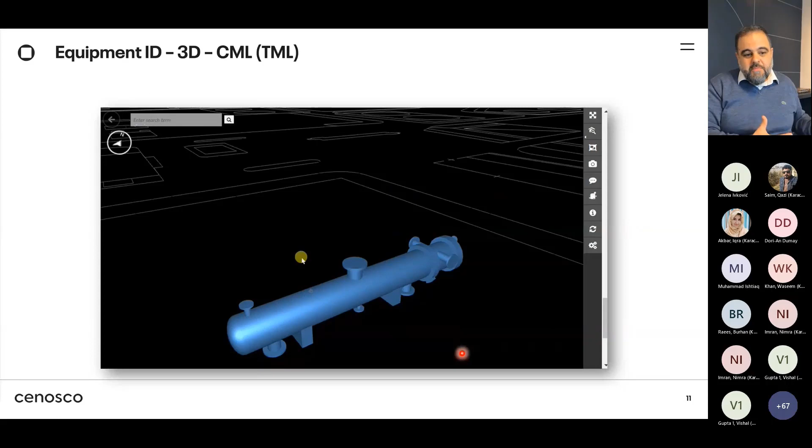Looking at the technology, how do we work with the tool? We do have 3D models, we do have isometrics. So you can open a 3D model on your right and open the isometric on the left and see where the CML is correlated. You can color code them, for example, color code in red the CMLs with the high corrosion rate. So the system is bringing all this technology on board.

When you're doing an RBI calculation, you can open the RBI, see the specifications, see inspection history, criticality, corrosion calculations from your wall thickness measurement, calculators from API, look at process conditions, and get a next inspection date where you have a schedule. That schedule has a plan, has activities or tasks. So you relate the equipment to a risk program, to a schedule, and that schedule will have tasks that are related to that degradation mechanism. So your inspection plan is heavily based on data.

IMS also brings a lot of features into barrier management. In IMS, we identify the degradation mechanism, we implement a barrier to prevent or control that degradation, and then we implement indicators. How do we know that barriers are effective? We know if the barrier is effective by using an IOW. If you have an exceedance, your barrier is compromised. If you do an inspection and find corrosion, your barrier is compromised - you don't have any more corrosion allowance.

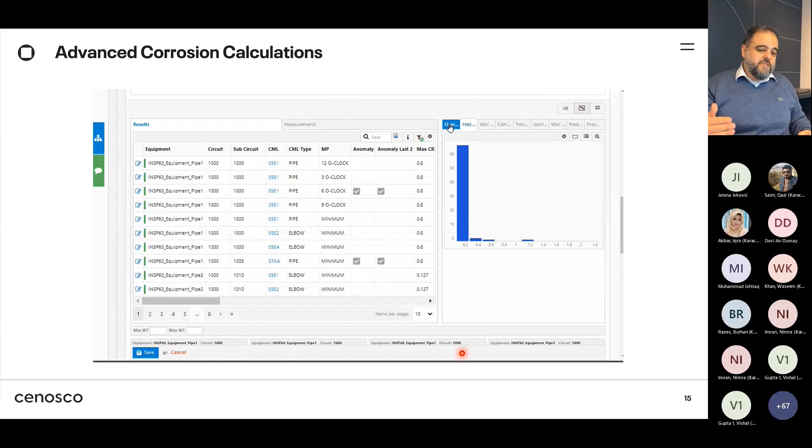There are advanced corrosion calculations, always looking at prediction, looking at historical wall thickness measurements and how that will behave. And then, if you have a piping system or a pressure vessel, you can compare different types of corrosion rate per equipment type, trending, the whole statistical part of it.

An important thing is that we do support importing Excel files. Throughout the whole application, if you want to update data in bulk, you can always export for import. So you export, change the data in Excel, and then import that back again.

We do have different separate templates. If you want to migrate data, everything is done out of the box from the user interface. You can import a single file, multiple files at the same time, or a file with multiple tabs. It's a very advanced feature to export for import that data.

I think you guys got my point. I could go on and on, exploring multiple examples covering mechanical integrity, rotating equipment, safety instrumentation, pipeline engineering calculation, risk management, inspection planning, inspection and maintenance execution, and the corrosion management framework. The approach would be the same. We have specific tools we call managed equipment care that look at optimization, the asset care strategy.

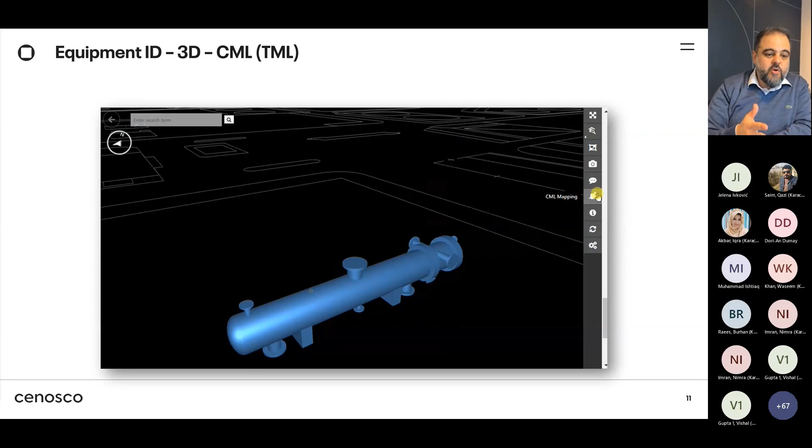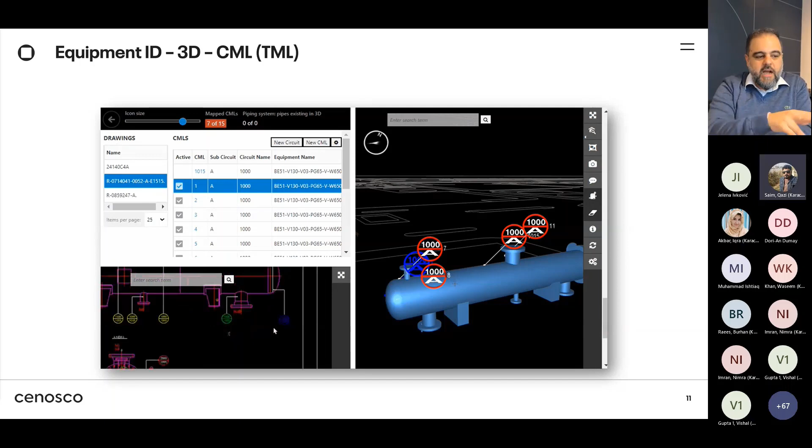Absolutely. You can import the drawings into the IMS database, or you can interface IMS with your SharePoint, or your library of documents or document management system like Assai. We can integrate that so we always receive the latest version of the drawing. Whenever you open your equipment page, you will see that 3D drawing and have that correlation with the isometric. Absolutely, it's fully part of IMS. You can bring that 3D model into IMS, or you can interface it. You see the isometric on the left. It's fully available, and you can make annotations in the field and so on.

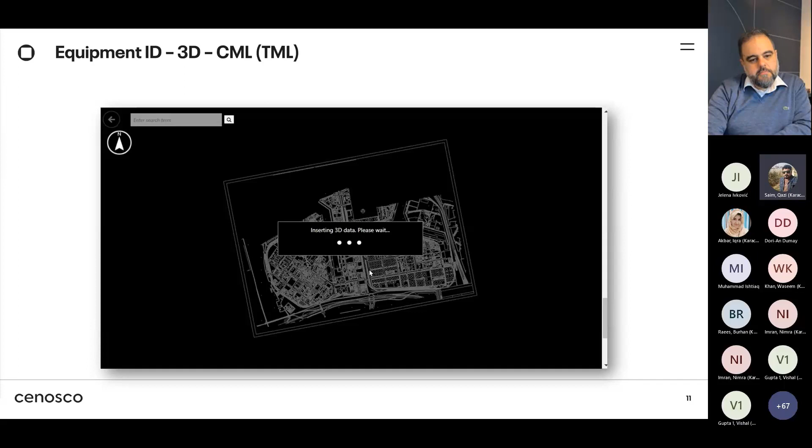We received another question asking whether this software provides semi-quantitative RBI study related to our RBI module, or qualitative, or both. It covers qualitative, where you just indicate what is the probability of failure and consequence. It can also go to semi-quantitative, there are specific ways of asking the question. You can say, my consequence is 1 million, or you can say my consequence is split up like that. Or you can go for a full API 581 calculation on the consequence. Same for the probability, you can base that on your know-how, or on the API 581 algorithm. So you can use any combination of that.

Question regarding KPIs: as you explained we have 150 KPIs, can we update them from management? So can we alter them as per our requirements and company policies? Absolutely, absolutely. The KPIs, dashboards, and queries you can build from the user interface. If you have good people who understand the logic of those queries and are good in Excel, basically can do some coding, it's easier for them. You can create your own KPIs, correlate data, create dashboards, pivot tables, everything in IMS from the user interface. We will give you all the training and manuals on how to do that.

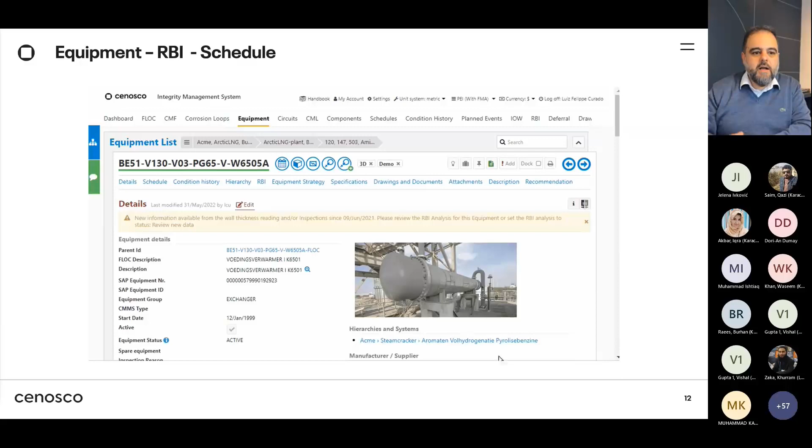Thank you, Mr. Luiz. This is the last question we are taking. Could you show the consequence analysis by indirect method in CENOSCO software? Yeah, I think we can talk about that on a different occasion. But the software will do the calculation. There are three types of consequence assessment: direct, simple, and detailed. The more detailed, the more data you need to look at.

So you can look at release rates, and you can look at the area calculation. There are a lot of calculators involved. All of that is in a very user-friendly way. They can be updated in bulk, and exported for import. So if needed, we can take it separately, and I can give you more in-depth detail about the methodologies that we cover in IMS.

Okay, the last one: is your RBI quantitative? Yeah. The core methodology that IMS has today we call SRBI. The S stands for Shell, so it's a Shell RBI methodology. It can be qualitative to semi-quantitative, so it has a lot of the calculations embedded. But we are working together with SGS in Pakistan to release the API 581 compliant module that will come in the next coming months. So today it is up to semi-quantitative, but in the near future we will have the fully quantitative approach.

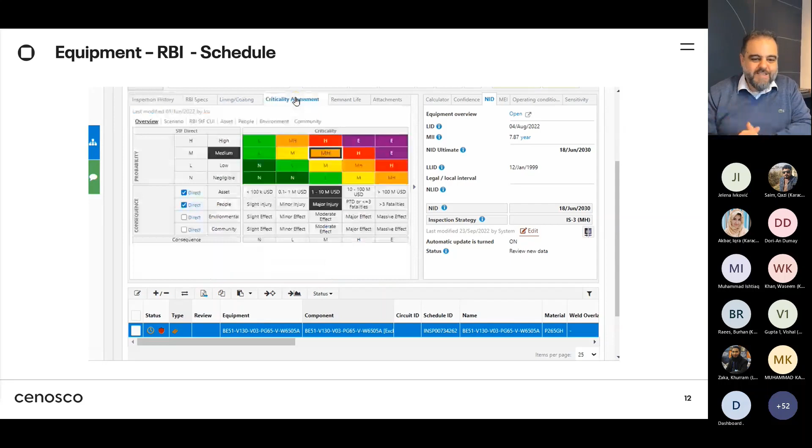We have written a blog post about the quantitative versus qualitative approach in RBI. If you're more interested, it's a subject that I like. Take a look on the CENOSCO website. What are the benefits, advantages and disadvantages of each of these methodologies? So we have the calculators of 581 calculation in this current software? Yes, we do.